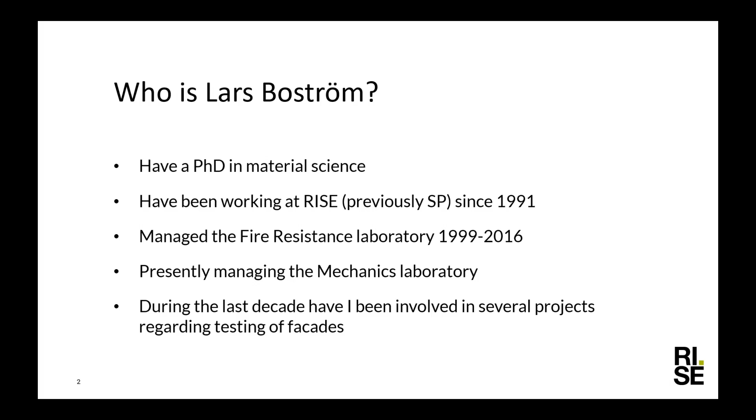So let's start this webinar about facades and fire. I think we all know that facades can burn and that they do burn. We have seen many different facade fires. Many times it goes well, and sometimes it goes very badly, as in the case of the Grenfell Tower fire two years ago.

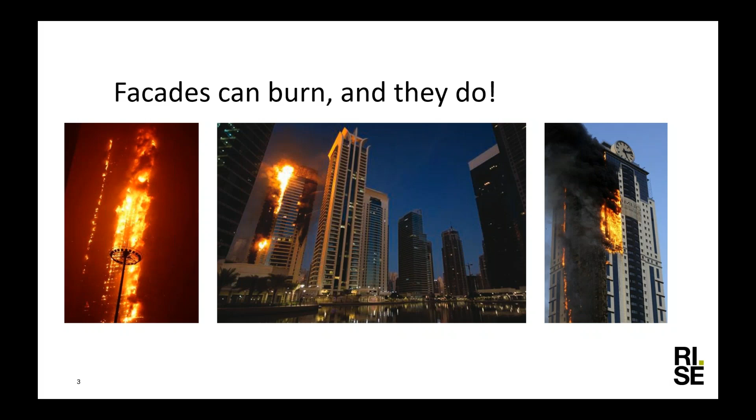Facade fires are very difficult to understand, I would say, so I think we have to go into a lot of details. Just to start, what is a facade? If we look in literature, on the web, or in building regulations, we can see there are a lot of different definitions of what a facade really is. In some cases it's just the outer skin of a building, in other cases it could be the complete exterior wall, and of course it can be everything in between. So the definition of facade is not clear, really, what is a facade.

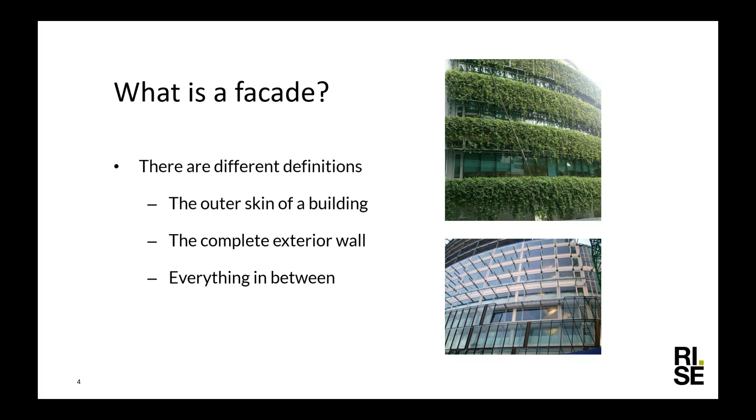Furthermore, if we start to look at a facade, it is quite often very complex. It is built up of different materials, and you can have different layers of materials, very complex geometries, and a lot of different detailing. You can have penetrations, you have windows. So it is a very complex structure. It's not so easy to understand as we often assume when we look at the test methods, where we build a wall, put one material on it, test it, and think that should be a model of what happens in real life. But it is not so simple.

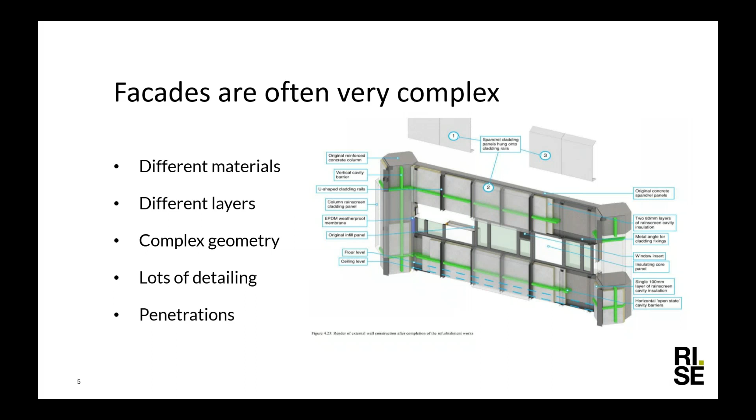Furthermore, we have different types of buildings. A typical Swedish cottage must of course have different rules compared to a high-rise building. Or if we look at buildings with special purpose like hospitals or housing for the elderly, there you have certain requirements. So the requirements on facades must be quite different depending on what type of building you're talking about.

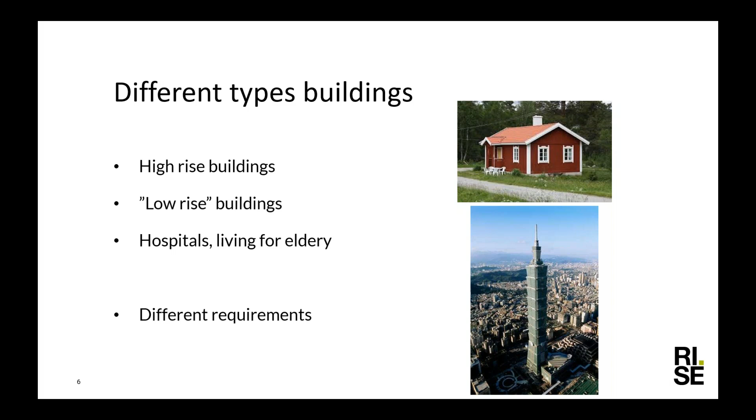And then we come to the fire scenarios. They can be quite different as well, and we have to define what kind of fire scenarios we are going to protect against. It could be fire from a neighboring building where you have an influence of radiation, and here we can see regulations and requirements, for instance, on the distance between buildings.

We also have the case with external fires. It could be a car or a garbage bin or something placed below a building that catches fire. And then, of course, we have the internal flashover fire from a fire cell that protrudes out from a window that breaks, which is the case that is most usually investigated through fire testing.

And then if we start to talk about fire spread, it can be on the outside of the facade if it protrudes out of a window, or we can get fire spread within the facade system, or it could also be between the facade system and the floor slab. So there are different scenarios that must be covered as well.

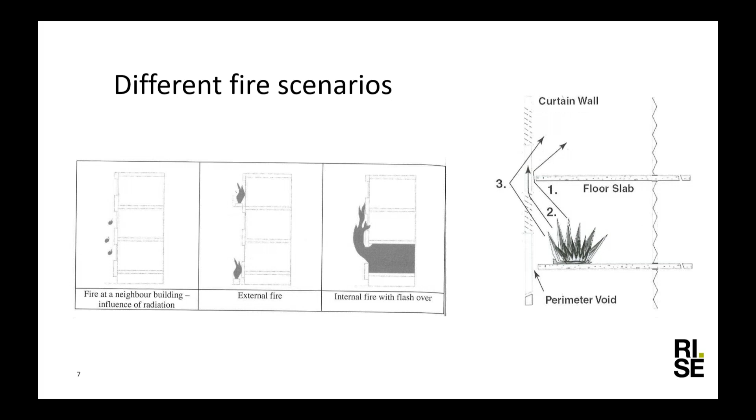So how do we assess the facade systems then? There are many different ways here, and we can see that in the regulation also. We have, of course, the tool fire safety engineering, which is a very good tool, and it is a possible way for some cases. I am not sure that it can be used for all cases.

We can see in some countries we have very much prescriptive rules. They are very good, but the drawback with the prescriptive rules is that they prevent new innovations.

We have the type approvals, where we have, for example, the CE marking, but we have also other national type approvals. And that could also be a system that works to assess facades.

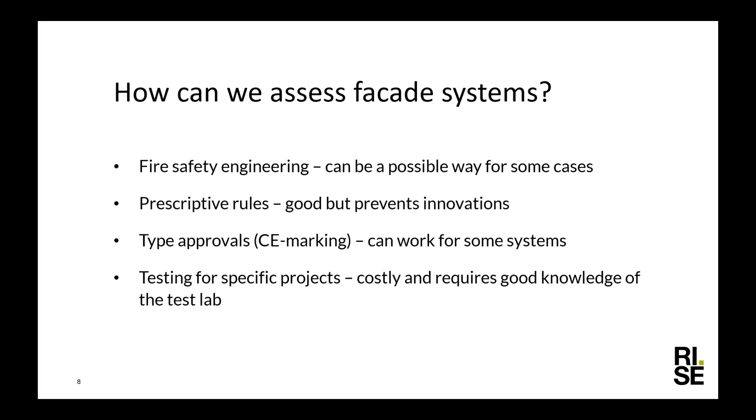And then, of course, we sometimes use specific testing for a specific project, which in many cases is a very costly solution. It also requires very good knowledge of the test lab, especially if it is a complex facade system that needs to be tested. So there are many different ways that the facades can be assessed.

Now I would like to say some words also about the testing and assessment methods that we're using today. We are talking about reaction to fire, we're talking about fire resistance, and we are talking about fire safety engineering. And we can see that in many regulations, at least in Europe, they are often based on the reaction to fire. And when we talk about reaction to fire, it is mainly material characteristics that we are looking at.

But we can see, when we're talking about facade fires, it is quite often a fire resistance problem really, because we do not want the fire to spread to another fire cell. And we also know that we have to rely on fire safety engineering, because we can't test everything. And we also know that we are using other safety measures as well, not only a test report or a test result, but we can use other measures, for example sprinklers, or other ways to get a fire safe situation.

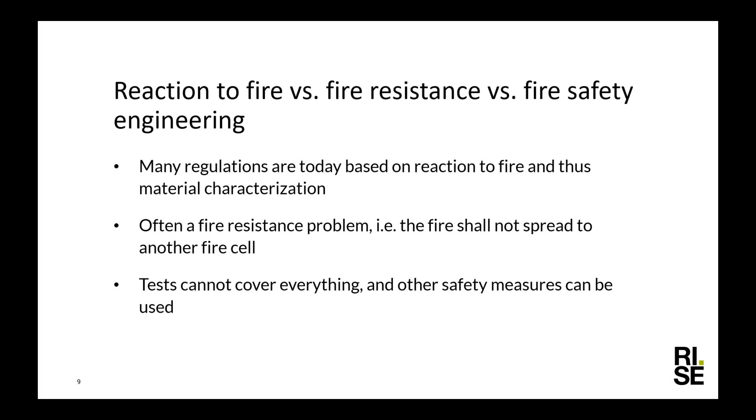So if we look in a little bit more detail at the reaction to fire tests, I can say it is used in all member states in Europe when we're talking about facades. In all member states we have requirements on the reaction to fire for facades. And this can give good information for some characteristics, and it is for specific materials, especially if we're talking about non-combustible materials.

But how reliable are the results if we are coming into the field of combustible materials? Can we really rely on the results from a reaction to fire report here? I'm not sure of that when we talk about facade fires, because it is a completely different fire scenario that we have in a facade fire compared to if you have a small fire in a room that you want to prevent from becoming a large fire.

And also I have questions when it comes to composites and sandwich materials, if the reaction to fire test gives the correct answers, if the materials are supposed to be used on facades. But I think the reaction to fire can be a complement in the assessment, and for sure it is good if we're talking about non-combustible materials.

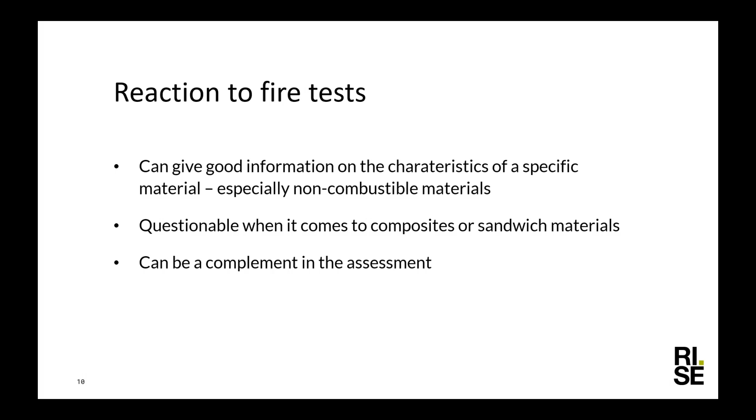If they then move on to fire resistance tests, they mainly look at the compartmentation, and that is, that the fire shall not spread from one fire cell to another fire cell. And that is, of course, a case when we're talking about facade fires, that we do not want the fire to spread from one fire cell to another fire cell. But it is not really the scenario that we look at in the fire resistance test.

We can evaluate, for example, penetrations, but we can only see in the fire resistance test if the fire spreads from the fire room and out to the other room. We cannot see if the fire will spread within the tested element.

And we are testing some facade systems in fire resistance tests, for example curtain walling. But here we're only looking at if the fire goes from the furnace and out to the open, not what happens within the tested system. But of course, fire resistance tests can also be a complement in the assessment of facades.

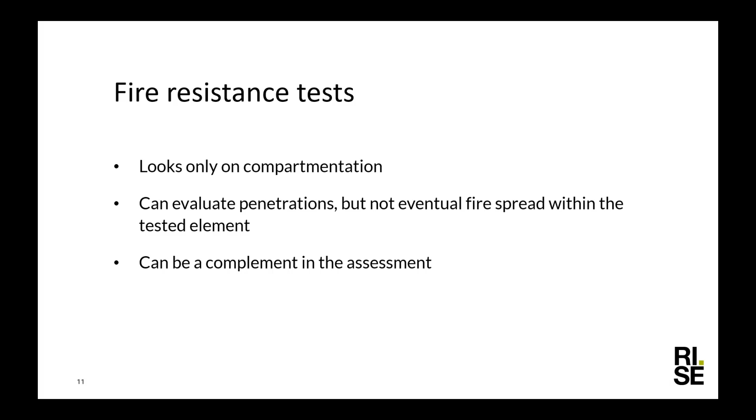And if we look at fire safety engineering, here we have the possibility to consider alternate safety measures, for example sprinklers. And we have also the possibility to evaluate more details, which can be difficult in testing, for example detailing around windows, perhaps certain penetrations, smaller details and so on.

But I think it is difficult to rely only on fire safety engineering when we're looking at facades, because it is, if not impossible, very difficult to calculate fire spread. But I think fire safety engineering is a very good tool to use in combination with testing in the assessment of facades.

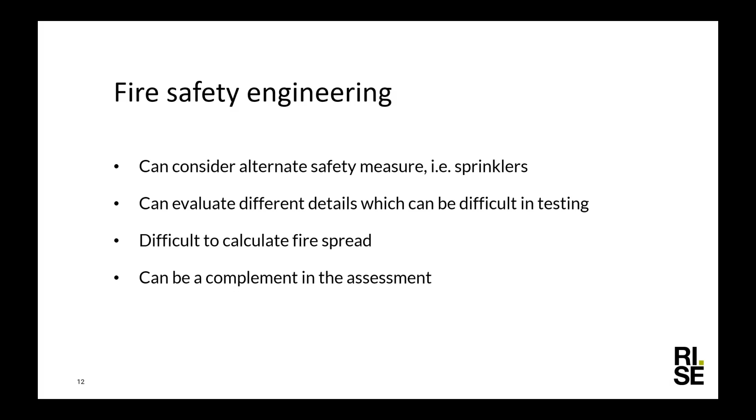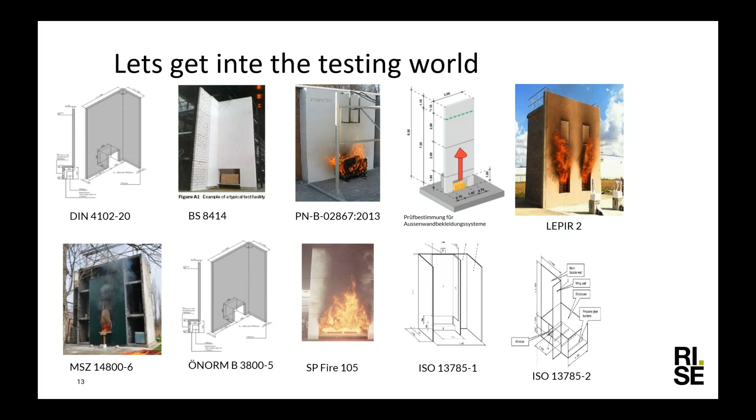And the facade test methods, how much do they show really? They show if the tested facade system has a potential to be safe, and of course it depends on what risks you're looking at. We also have to see that the tests are always made under perfect and controlled conditions, and it is a standard fire scenario that we are using. So it is a simplified model of reality.

We also know that in these facade test methods, it's very difficult to evaluate detailing, especially smaller details. Perhaps we can see some bigger things, like if you have a window opening, will that affect the fire spread in any way? We also have difficulties assessing more complex geometries of facade systems. So there are a number of things that we cannot really assess through testing.

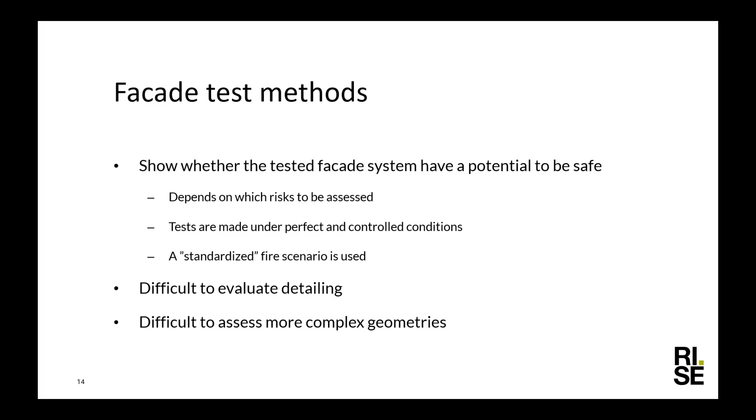And we can also see that the requirements are quite different. What are we going to look at? What is important to assess? Is it the fire spread upwards or horizontally on the facade surface in the facade system?

Are we going to look at falling parts and burning debris? Burning debris can spread the fire downwards, and falling parts can make it difficult for the fire brigade to do their work. We have the junction between facade and floor - is that supposed to be investigated through a facade test, or can we rely on fire resistance testing there?

I'm not sure. We have the problem with smoldering fires. Today it is mainly Germany that is looking at smoldering fires, but I'm sure that the problem is valid all over the world. And how do we assess that we have really put out the fire on the facade system?

Smoke is an important issue. We know that smoke is the main killer during fires. And how can we measure smoke from a facade test? I don't know - it is not done today. I know that there are regulators that would like to have some regulations on smoke also for facade fires, but that is quite a difficult task, I would say.

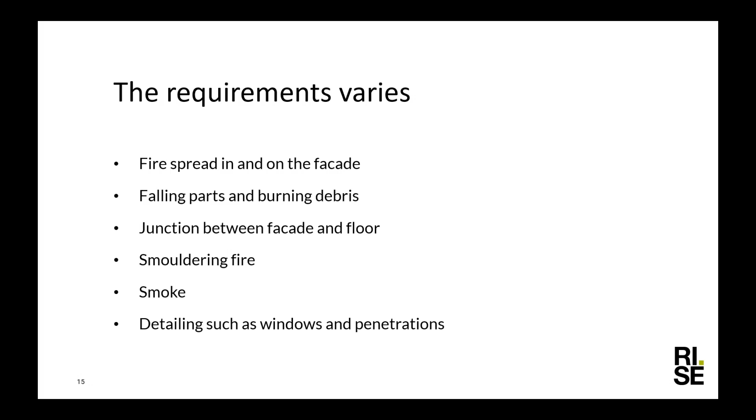So the situation in Europe: we have a harmonization, and the main objective with this harmonization, where we have the building regulation, is to make trade easier between the member states. And we have the CE marking. I would say the CE marking is a trading mark, not a quality mark. It gives you the license to trade your product between the member states.

And we have done the construction products regulation that sets up the system for the CE marking, and that is mandatory in Europe. Although we have to remember that the building regulations, that is a task for each member state on their own. So each member state puts up their own building regulation, but they have to accept CE marked products.

So now the European Commission wants to go for a harmonized product standard also for facades. And to get the harmonized product standard for facades, we have to have some standard procedure on how to assess the facades.

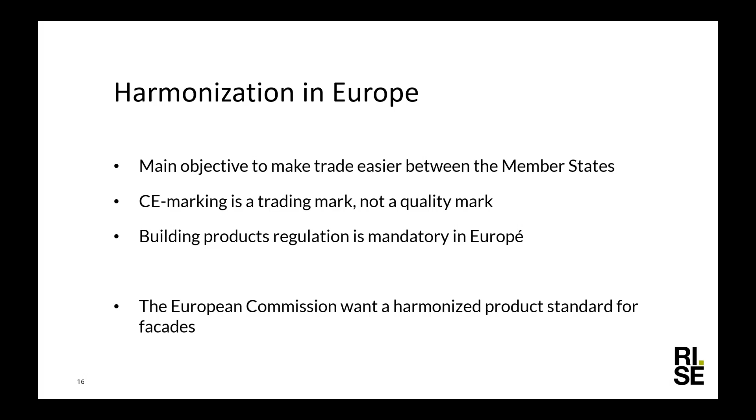So 2.5 years ago, a project was launched. It was financed by the European Commission, and that was to perform a study on the fire performance of facades and to propose test methods and a classification system.

We were a group that were supposed to do this work, and what we had to do was to make an inventory of all the national building regulations in the member states, because this method and classification system should fit all the regulations currently used in the member states.

It was also decided from the Commission that we should work with the two test methods used in Germany and in the UK. That is DIN 4102-20, which is the German test method, and the British Standard 8414. Those two methods should be the basis for the proposed new harmonized test method.

And we should also show how a classification system could look like, and finally define what needs to be done after this project has been carried out.

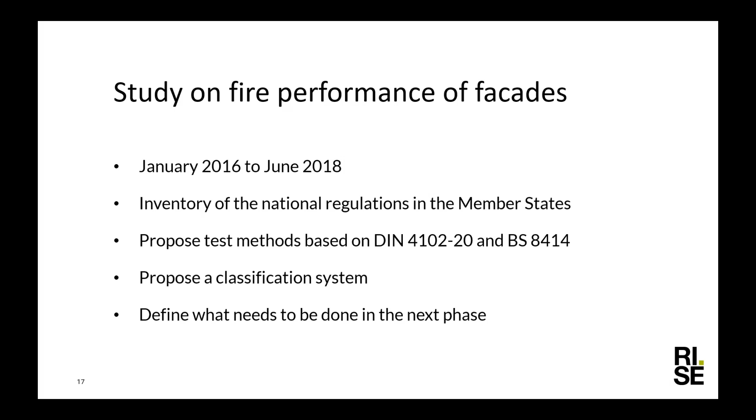So we were a consortium with representatives from RISE here in Sweden, from BAM in Germany, from Effectis in France, BRE in UK, and EMI in Hungary, who was the project group.

And we knew from the beginning that this is not something we could solve ourselves, so we had subcontractors from most of the member states in Europe in order to get information from all member states.

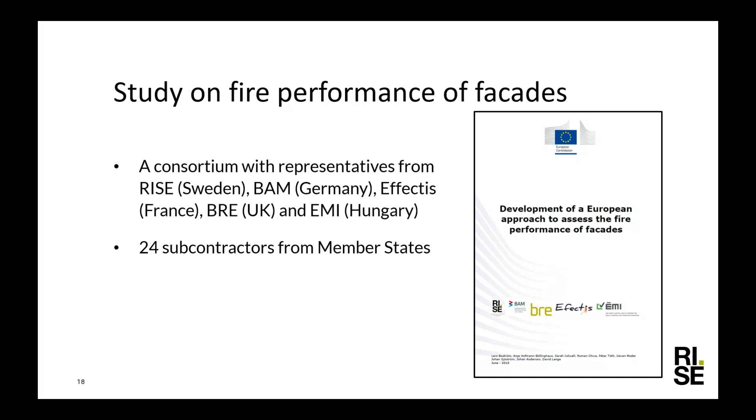If we go into the results, we could see that all the member states have regulations regarding the fire performance of facades. So all member states have some sort of regulation here, mainly based on the existing European system on reaction to fire and fire resistance. So all member states have some regulation for facades on reaction to fire, and some have also something on fire resistance.

In 14 of the member states, they have additional requirements that are not covered by the European system for fire resistance and reaction to fire. So 14 member states are using some additional tests that must be done.

Some countries specify a specific test method that must be used. And some countries make it possible to have some performance-based testing as well, where they do not exactly describe what test method to be used. They're a little bit more free there.

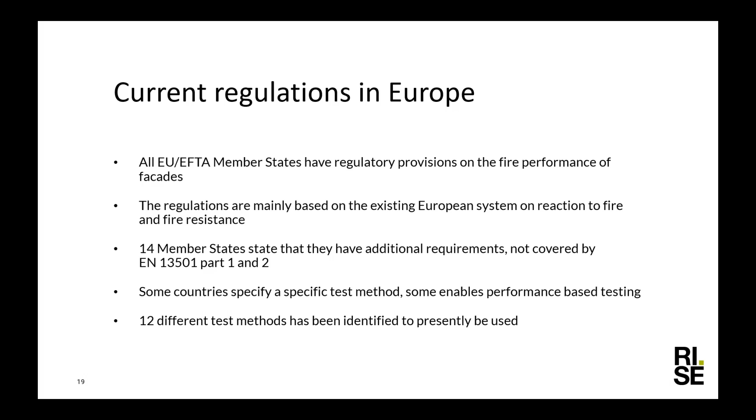Here is a list of the test methods used, and they are all different, but to some extent very similar, all of them. So we can say that the sizes are different, but it is mainly a surface which you expose to a fire, and you look on the fire spread on the facade.

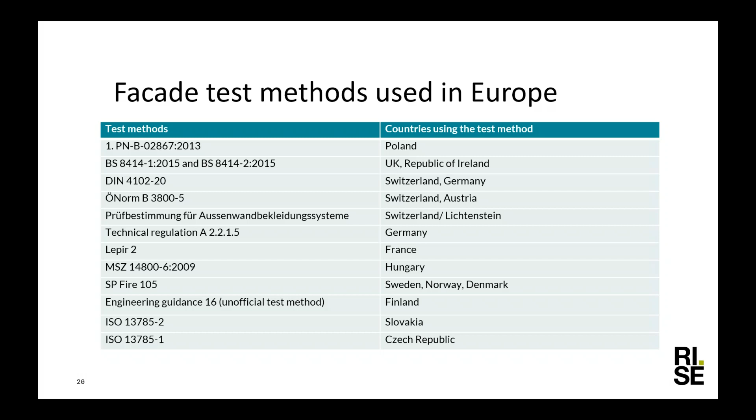But what we are looking on is a little bit different. They target different aspects on what to assess during the tests.

So flame spread is of course one important target that most of the methods are looking on, mainly vertical flame spread, but in some countries they are also looking on horizontal flame spread, and it is both on the surface and within the facade system.

In some methods we're looking on fire spread from one room to another room, where they build up more like a house. You have the method used in France, for example. You have a method used in Hungary, where they have rooms where they put the fire in a room, and then they look on the room one floor above, that the fire should not spread to that room.

In France, you also look on the junction between the facade system and the floor. In some countries, it is also mandatory to have some kind of windows or openings, fictitious windows we can say, that must be included in the test to see the detailing around the window openings.

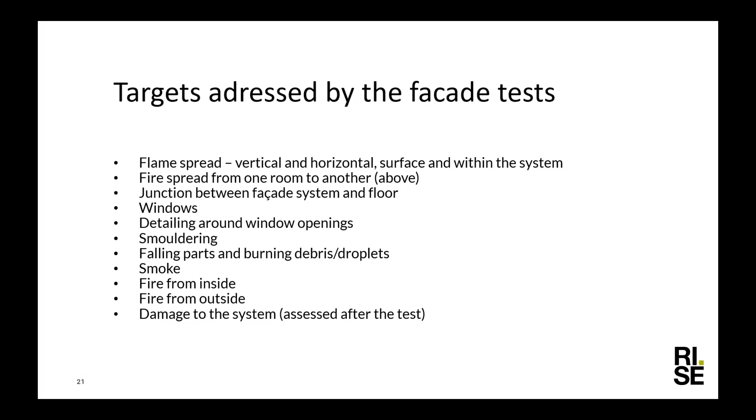So if we look on the parameters to be assessed, we can see that vertical flame spread is assessed in all countries that have a requirement that a large fire test should be done. The horizontal flame spread is used in several countries, but not every country. And the flame spread within the facade is in all countries except for Hungary. The junction between floor and facade, there are three countries that are looking on that, and that is Hungary, Sweden, and France.

In some countries, they have some heat requirements also, and they're not only looking at flame spread to a certain level, but they have some kind of heat flux measurements that should be done, for example, in window openings, and that is used in some countries. And finally, some countries have regulations also on detailing.

Smoldering, it is only Germany. Falling parts, there you have it in several countries. And smoke is mentioned in the regulations in both Sweden and Germany, but there are no requirements really on it. It just says that the smoke production should be minimized and so on. But it should be observed, though we cannot assess it.

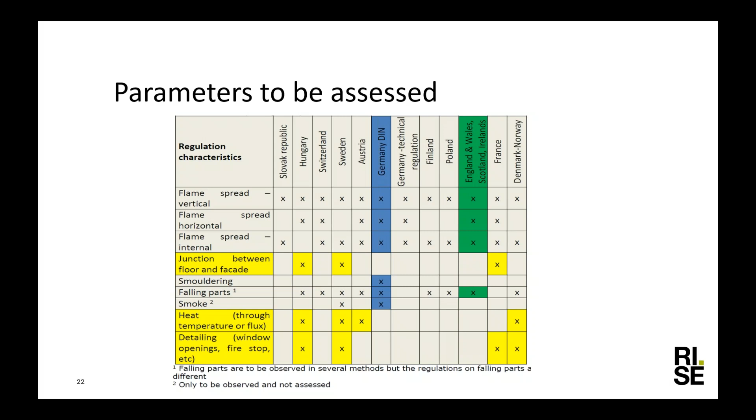So this was a starting point on how to develop a harmonized method, and we could see that there are many things that we have to consider. It was also obvious from the beginning that the two methods proposed to start with, the German method and the British method, some things were lacking in them, so we couldn't complete the map with all the details that we wanted to or needed to have assessments for.

So in our work, we proposed two different methods. One is the proposed method, which was ordered by the European Commission, and that was to keep the British and the German standard as they are, but we could see that we had to do some minor adjustments on these methods anyway, otherwise we couldn't fulfill the requirements that they have in some countries. So we concentrated our work on trying to develop an alternative method to combine the British and the German method into one method instead, and this was a proposal made by the consortium.

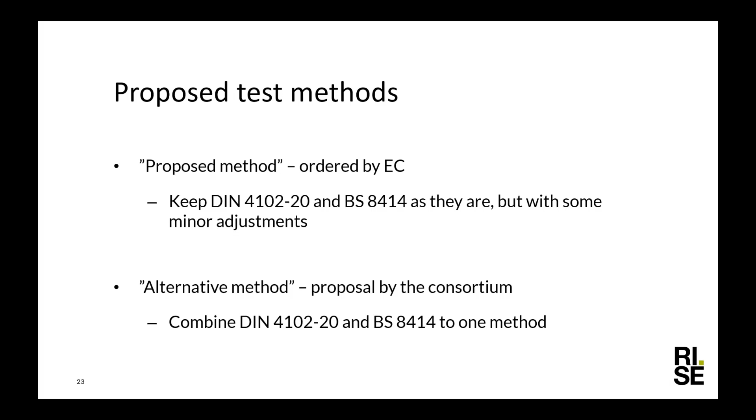So if we look on the proposed method, and that was to keep the British and the German method, then we would end up with two different test methods. One test method where we use what we call a medium fire exposure - a smaller fire, a small wood crib, if I remember correctly 20 kilos of wood. And then one large fire exposure test, which is the British, where you have a large wood crib, 400 kilos of wood. So it's two quite different tests - we call them medium fire exposure and large fire exposure.

Both of these methods lack in the measurement and evaluation of falling parts, which needs to be added, because that is a requirement currently used in several member states. And if the falling parts and the burning debris are to be evaluated, then we may need to change the geometry of the test rig and lift them up so that any debris that falls down on the floor should not be ignited by the fire source. So there needs to be some modifications to the geometry of the test rig if we're going to evaluate the falling parts and the burning debris.

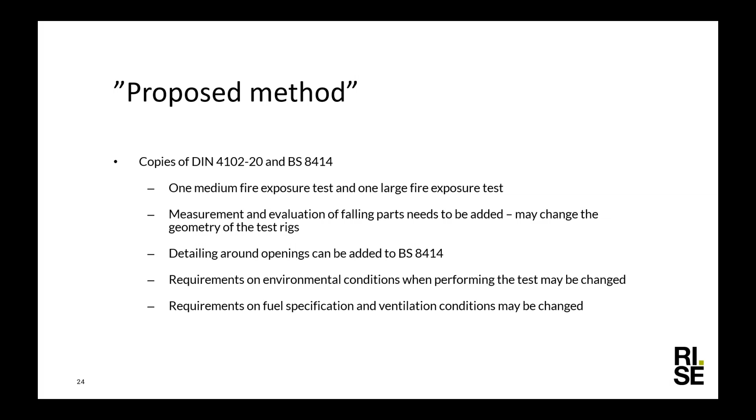If we then look at the alternative method proposed by the consortium of this project, that is to combine the two methods, the German and the British method, into one test setup. We can see that the geometry of the test setup is approximately the same. The big difference between the two methods is the size of the combustion chamber. So if we are smart and use our engineering skills, I think we can easily have one test rig where we can perform both tests, so then I have one medium size fire test and one large size fire test in one test setup.

We can also see that the position of the measurements done are different in the two methods, but I think with some smart thinking we can use the same position for the measurements also. We can surely get a way to assess also detailing around the openings, and by uplifting the whole rig we can assess fire spread downwards through burning parts and falling off.

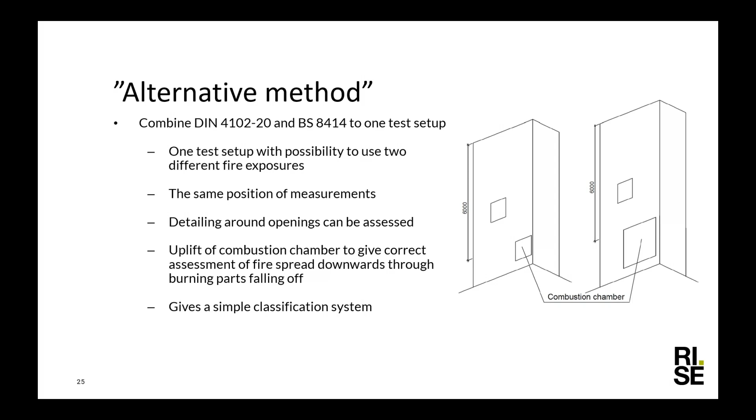So if we move forward and look at the classification system we propose, and this is only for the alternative method, it will be quite simple. We end up with 4 classes where the highest class covers all the other classes - that is the large exposure when it fulfills flame spread and also fulfills the criteria on falling parts and burning debris. So this would be quite a simple solution for a harmonized test method.

Then the question is, is this enough with classes? Do we need more classes? Is it enough to have only these 4 classes? I'm not sure. I will come back to that later.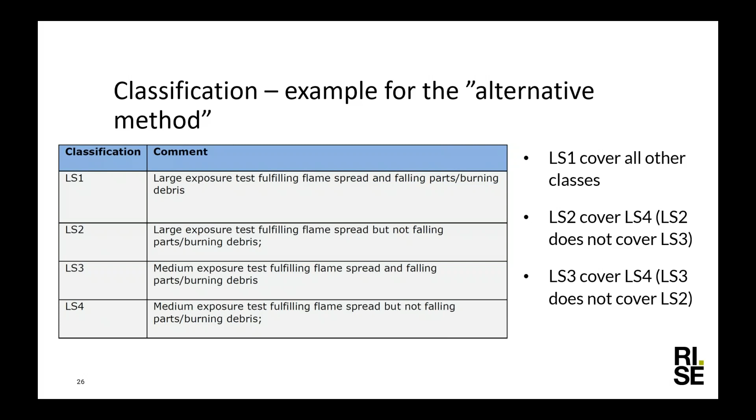So we have made the proposal in this project, at least on 2 different methods that could be worked with in the future. I know that the European Commission has said they need to have more work done after what we have done so far, and they will come with an invitation to tender. It was supposed to come out before the summer, but it has been delayed, and I don't know when it will come. We do not know at this stage which alternative they want to work on in the future - whether to keep the British and German methods as they are, or go with the alternative method. We know they want to have this solved very quickly, so it's supposed to be a 2-year project to finalize the test and classification methods.

And the focus on this work is mainly then on getting something so we can CE-mark facade systems. It is not a test method that gives any value for fire safety engineering and so on. And we also know that a big question still is to define the field of application, because that is very important. If you do not have it, you will get an approval for the system that you have tested and nothing more. And I'm sure that the industry would like to have the possibility to make some changes, changing some detailing, or setting up a test series with a few tests that can cover a much wider spectrum of facade systems. So the field of application is a very important part, which has not started yet, we can say.

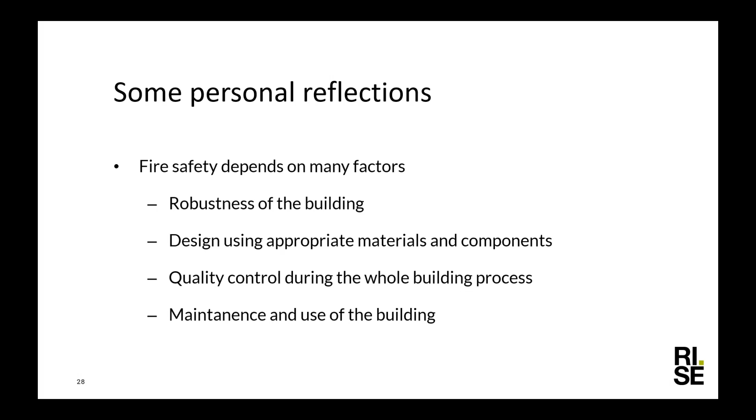And then we have to remember that I'm talking a lot about testing today, and a test is just a simplified model of reality. So to rely on the test only, that can be quite dangerous. And we know that facades are very complex, and it is not possible to get all the answers from a test. So we have to have engineers and architects, as well as the labor at the building site. They have a big responsibility that everything is done in a correct way, and that we're using appropriate materials and solutions. So I think that a mix of available data from tests, from fire safety engineering and quality control, and the maintenance - that is very important to get a mix of all this in order to get safe facades in the future.

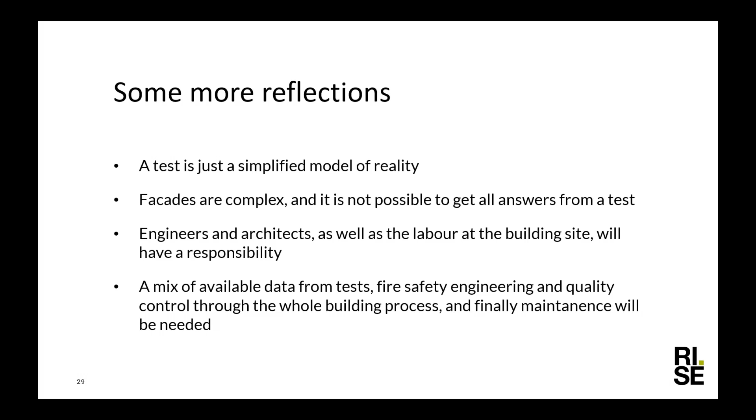And with that, I would like to thank you for your attention. And I welcome any questions.

All right. Thanks a lot, Lars. Yes, I think we do have some time to take questions. So, okay, let's get started. I can tell you there are a few questions there. So this demonstrates that your presentation was very attractive for the people. So let's go for the first one.

The first one is related to sprinklers. It asks whether you think that sprinklers could limit the potential for an interior fire to ignite an exterior facade, or limit an exterior fire from entering the building. No, I think we have to remember this can be quite different depending on what the building regulations are based on. I can talk about Sweden, for example. In Sweden, it is that we want to buy time - time until it becomes a big fire. So through sprinklers, we can buy some extra time for the fire brigade to do their work. And in Sweden, for example, we have in the building regulation that if you install sprinklers in some kinds of buildings, then you can lower the requirements on the facade system. If you do not have a sprinkler, then you have higher requirements on the facade.